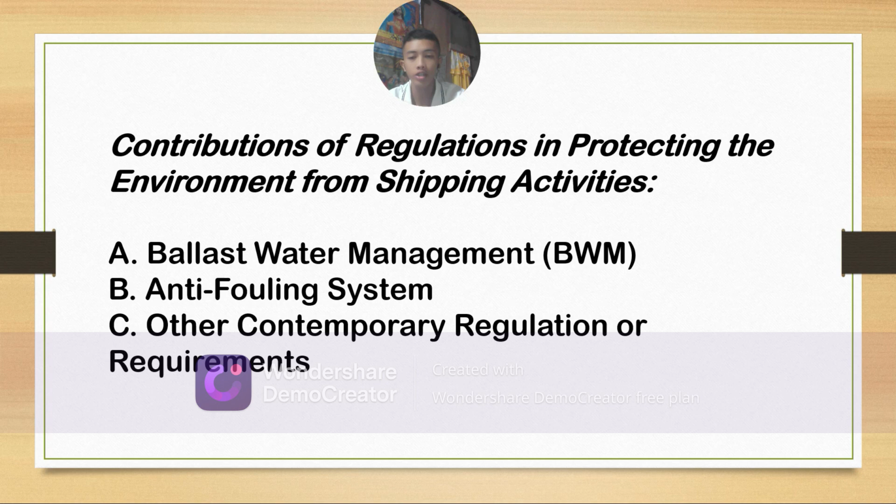A. Ballast water management. The International Convention for the Control and Management of Ships' Ballast Water and Sediments was adopted by the IMO to address the environmental risk associated with the transfer of harmful aquatic organisms and pathogens through ships' ballast water.

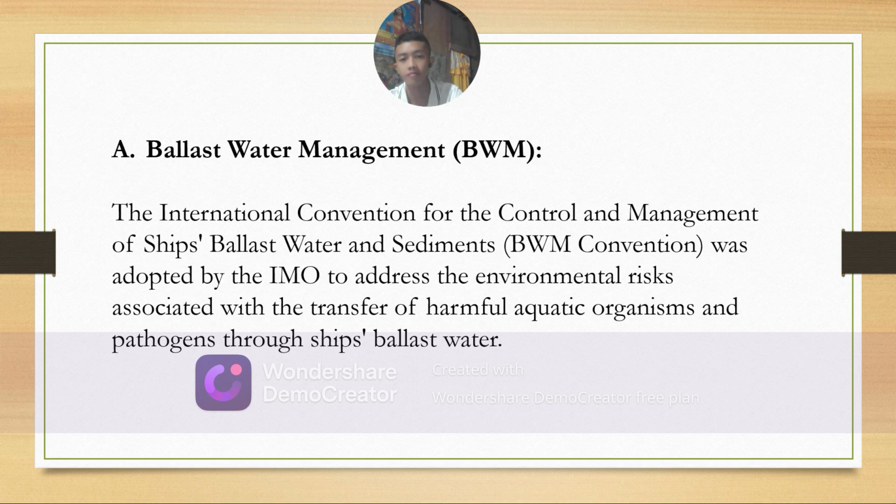Contribution of ballast water management. Number 1 is prevention of invasive species. Require ships to manage ballast water to prevent the introduction of non-native aquatic species into new environments, which can disrupt local ecosystems and biodiversity. Number 2, improved ecosystem health.

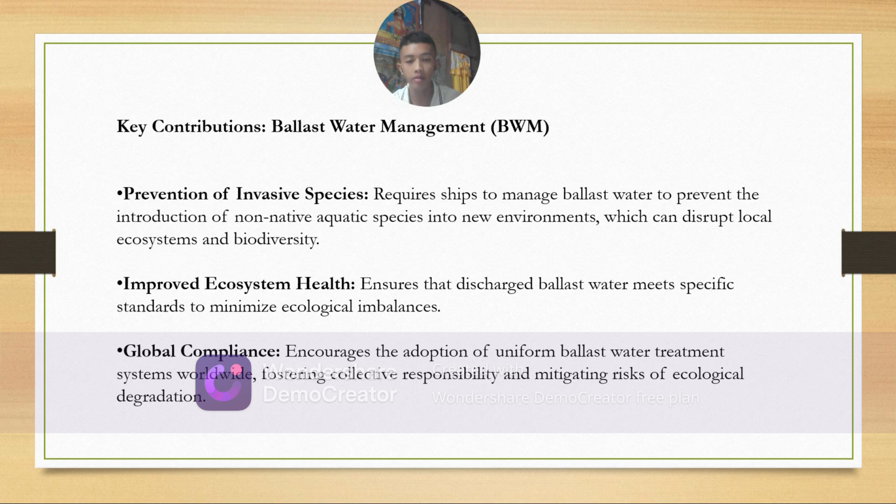Ensures that discharged ballast water meets specific standards to minimize ecological imbalances. Number 3, global compliance. Encourages the adoption of uniform ballast water treatment systems worldwide, fostering collective responsibility and mitigating risk of ecological degradation.

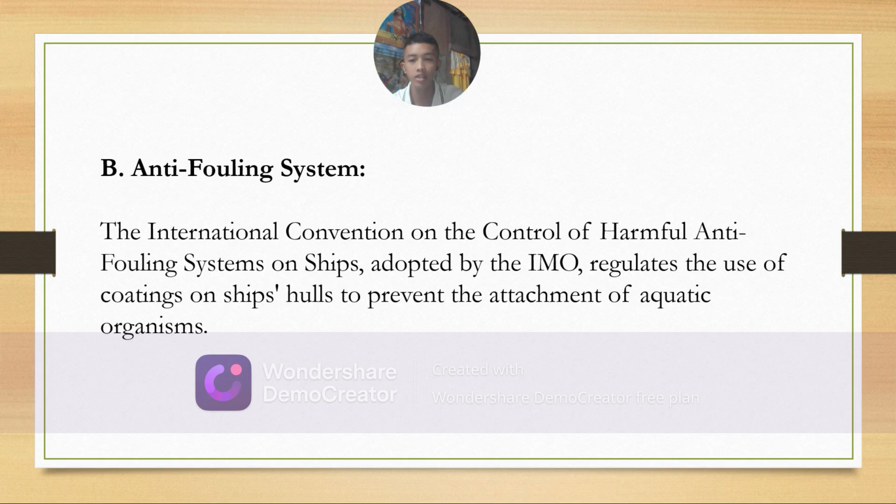B. Anti-fouling system. The International Convention on the Control of Harmful Anti-Fouling Systems on Ships, adopted by IMO, regulates the use of coatings on ships' hulls to prevent the attachment of aquatic organisms. Contribution of anti-fouling system. Number 1 is reduction of toxic substances.

Prohibited harmful substances like tributyltin, which were previously used in anti-fouling paints but are highly toxic to marine organisms and persist in the environment. 2. Minimize biofouling impact. Reduces the accumulation of biofouling organisms on ships, which can carry invasive species and increase drag, leading to higher fuel consumption and emissions.

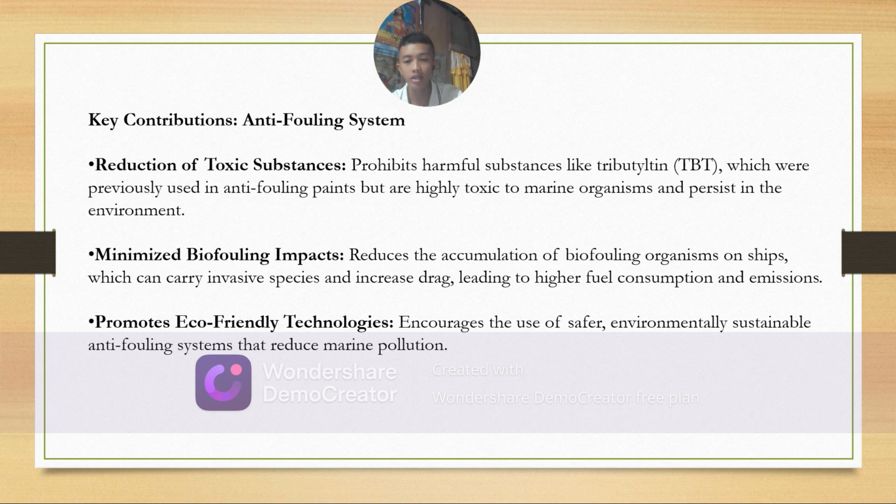Number 3 is promotes eco-friendly technologies. Encourages the use of safer, environmentally sustainable anti-fouling systems that reduce marine pollution. C. Other contemporary regulation or requirements. Several additional regulations have been introduced to address various environmental challenges from shipping activities.

Number 1. MARPOL, or International Convention for the Prevention of Pollution from Ships. A. Air pollution. MARPOL Annex VI sets limits on sulfur oxide and nitrogen oxide emissions to improve air quality and reduce acid rain. B. Oil and chemical pollution. Annex I and Annex II regulate operational discharges of oil and harmful substances into the sea.

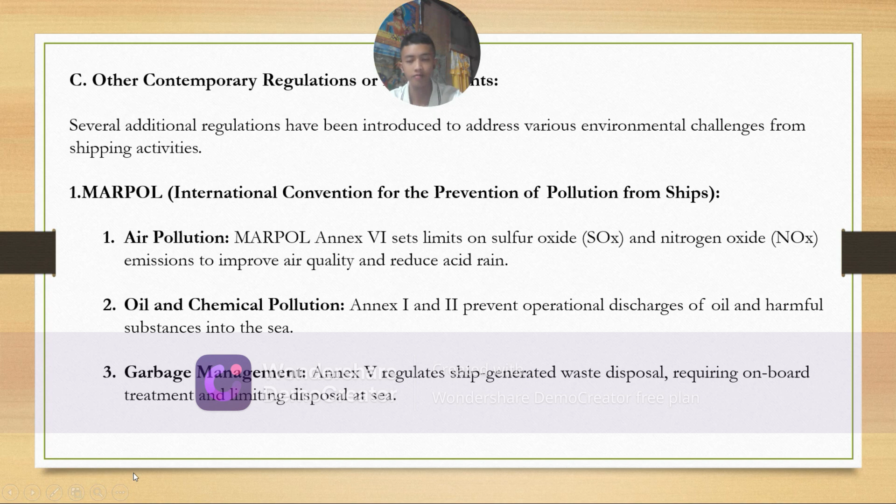C. Garbage management. Annex V regulates ship-generated waste disposal, requiring onboard treatment and limiting disposal at sea. Number 1, Energy Efficiency Design Index and Ship Energy Efficiency Management Plan. Energy efficiency. These requirements mandate ships to optimize design and operations to minimize greenhouse gas emissions, supporting global climate change mitigation efforts.

Number 2, biofouling guidelines. Complementing anti-fouling systems, these guidelines aim to prevent the spread of invasive species by addressing biofouling on hulls and underwater structures. Number 3, Polar Code. Protection of polar regions. Sets safety and environmental standards for ships operating in fragile Arctic and Antarctic ecosystems to prevent oil spills, ice damage, and habitat disruption.

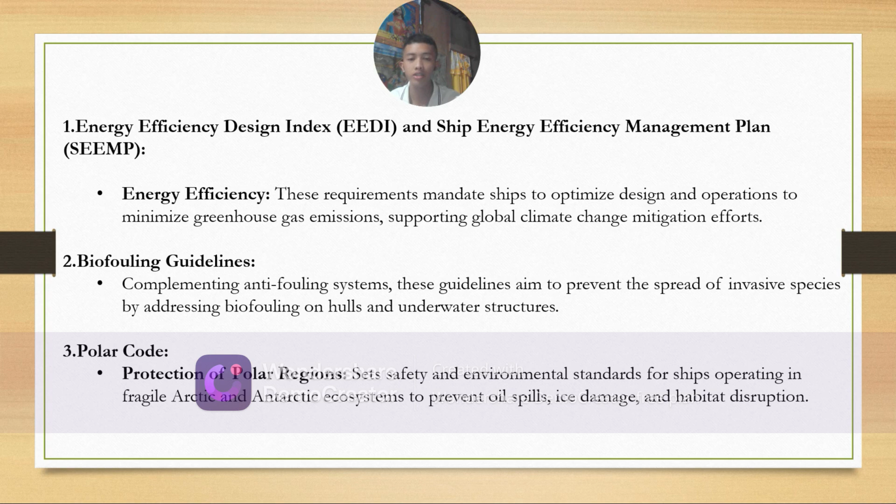These regulations collectively ensure sustainable shipping practices, minimize ecological harm, and encourage the maritime industry to adopt innovative, environmentally friendly technologies, contributing to global efforts to protect marine biodiversity and mitigate climate change.